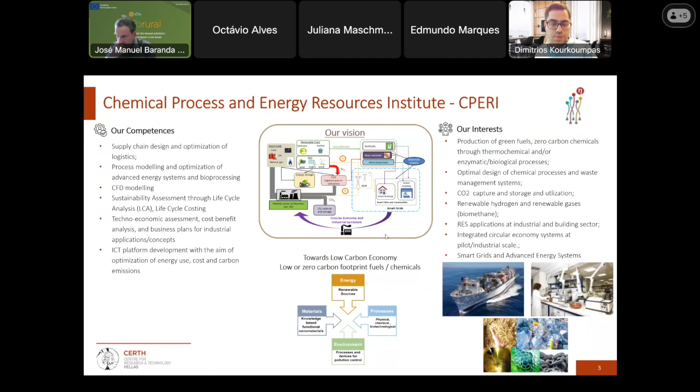Here are our group competencies, especially for circular economy, life cycle analysis and life cycle costing, which I'm leading here at CERTH.

Based on the reports and the needs of industries, we can estimate environmental assessment and economic assessment under a sustainability framework, in order to provide guidelines to industries about their environmental footprint and economic analysis.

Some activities we do in that sector include supply chain design and optimization of logistics, the production of zero, green, carbon-negative chemicals and fuels for circular bio-based systems. We develop algorithms for LCA and LCC, and we develop multi-criteria analysis for the estimation of processes under different pillars: economic, environmental, and social.

We develop business models, and as I mentioned before, we also develop an ICT platform that we will see later in the project, how we developed it and what its use is.

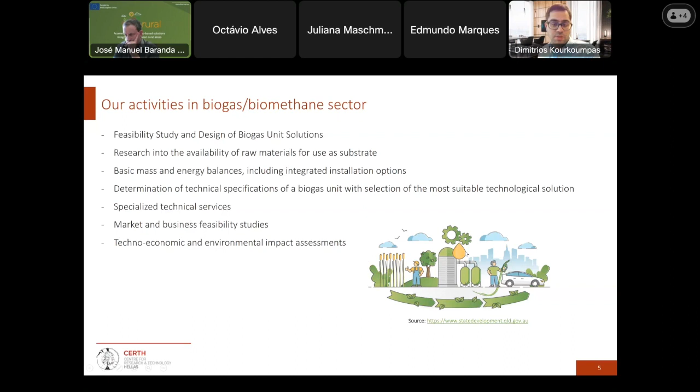We start from laboratory activities and reach up to TRL 5. We have a pilot reactor so we can simulate the activities of an industrial biogas reactor, with a capacity of about 20 liters.

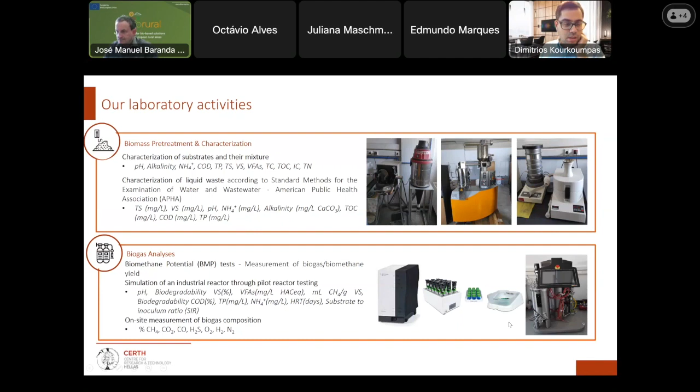Now some issues about biogas. Biogas is of course an energy resource, composed of methane and CO2, and by upgrading biogas we can reach biomethane. We also have a digestate that can be used as fertilizer, which can be characterized according to the latest regulation framework, FPR 2019.

But apart from those products, digestate and biomethane, we have also a new one: biogenic CO2 emissions. There is quite a big discussion in Europe about its use, and we'll see later on a project we are involved in, with the basic scope of producing biochemicals using these biogenic CO2 emissions.

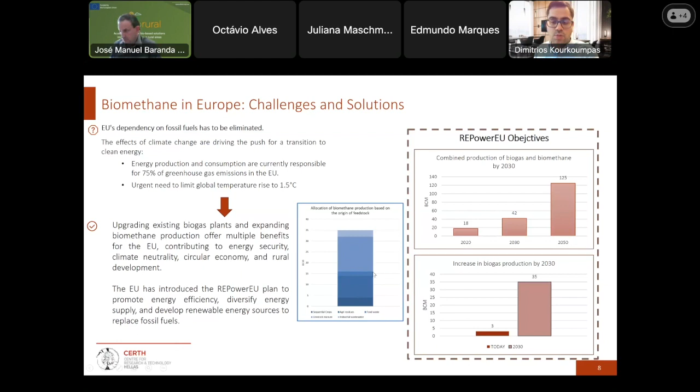Here are some key issues about Repower EU. As we mentioned, Europe promotes utilizing feedstocks from different sectors - agricultural sector, municipal sector, industrial sector - especially manure, sewage sludge, and other bioproducts from industries, to produce biogas and then upgrade it to biomethane.

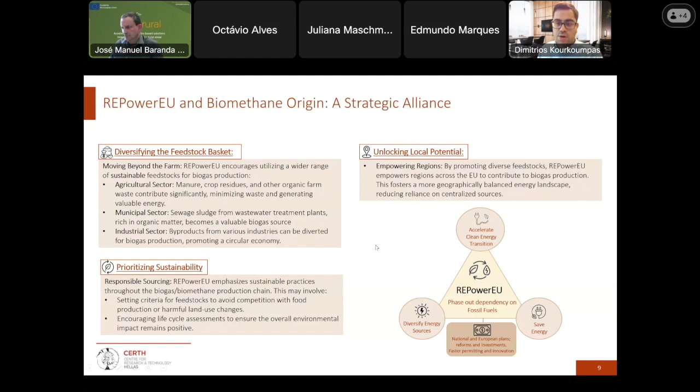There is also prioritization of sustainability, encouraging life cycle assessments to ensure the overall environmental impact remains positive, and sometimes we use negative emissions when we store CO2 and then utilize it in an added value product. Finally, it's quite significant to unlock local potential, because as we can see in the project we are involved in, there's a lot of potential for producing biomethane, but because of problems especially in logistics and the supply chain, this potential remains locked. So it is quite critical how we can unlock this and proceed to investments in the biomethane sector.

Let's continue with the first project I would like to present in this workshop. First of all, it's a biomethane project about demonstrating and connecting production innovations in the biomethane universe - that's the title. We have to develop new technologies, especially for biomethane production, in order to reduce the overall biomethane production cost and increase biomethane production compared to conventional technologies.

In addition, we have to estimate their sustainability, the environmental footprint, and the economic evaluation of those technologies, and of course propose how we can replicate this. This is quite significant in Europe - how we can replicate those technologies and go to the next level, to upscale them.

We have 5 demos in 5 different countries. First of all, it's in Greece, where CERTH is the demo leader, and here it's an ex situ thermochemical catalytic methanation using hydrogen - we will see more details in the next slide. The second one is the French case - in situ and ex situ electromethanogenesis for enhancing biogas production using electricity.

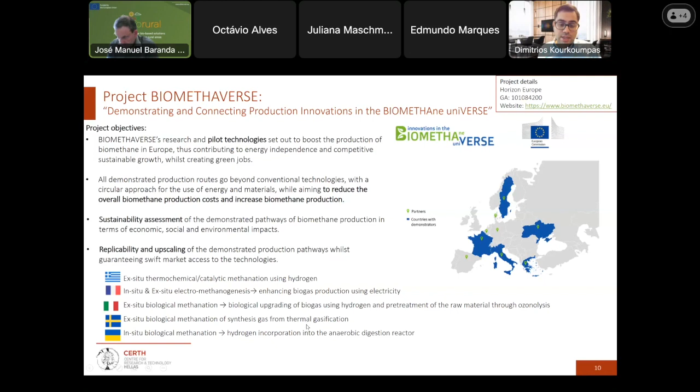The third one is the Italian use case - ex situ biological methanation for upgrading biogas using hydrogen, with treatment of the raw material through ozonolysis, here especially for sugar sludge as feedstock. Ex situ biological methanation of synthesis gas from thermal gasification. And finally, we have the Ukraine use case with in situ biological methanation, where hydrogen is incorporated into the anaerobic digestion reactor in order to produce high quality methane.

Now about the biomethane pilot plant in Greece. Just to clarify, in Greece we don't yet have a legislative framework for biomethane production, so this will be the first pilot plant developed in Greece. It will be located in an industrial biogas plant in Lagadas, North Greece. Biogas Lagadas is also a partner in the project, and we call it this demo.

Some technical specifications about the biogas plant in Lagadas: they use about 80,000 tons of livestock waste per year, produce 8,400 megawatt hours of electricity, and produce around 75,000 tons of digestate suitable to be used as fertilizer. The capacity is about 300 cubic meters of methane per hour, they operate two fermenters, and the total flow is about 500 cubic meters per hour at 100 millibar. The capacity is 1 megawatt electrical.

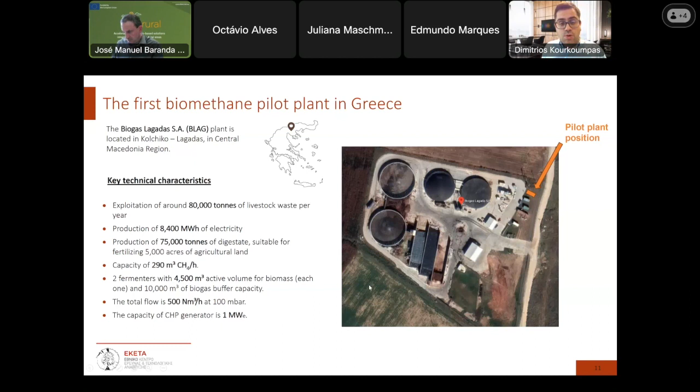I think you will see more details tomorrow, on the second day, in the presentation from my colleague Themis who is working for Biogas Lagadas.

So some issues, a brief description about the technology. As we mentioned, this is a thermocatalytic technology. There is the biogas, with input biogas flow about 6 cubic meters per hour. The composition is around 60% methane and around 40% carbon dioxide, and of course there are also some more impurities. After purification, you can see here the hydrogen and the thermocatalytic process in order to produce biomethane using the CO2 and the hydrogen.

So this is a technology not yet demonstrated for biogas. We start from TRL5. There are some pilot units around the world doing this work for syngas, but not for biogas.

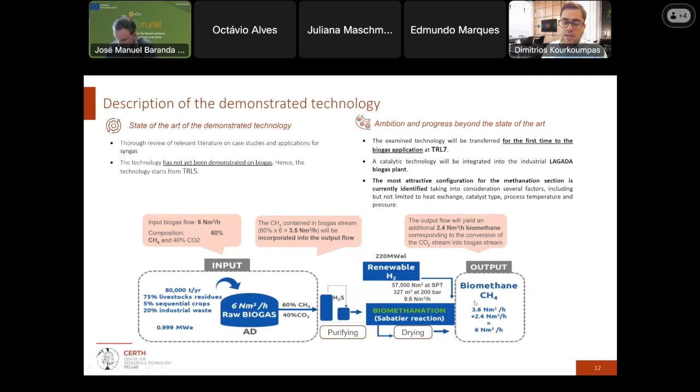Now we are working to find the most suitable configuration for the methanation section, working on the catalyst performance in order to produce high quality biomethane. Next steps involve the erection of this biomethane plant in Lagada, integrated with all other components, like for example hydrogen tank, providing hydrogen in this pilot plant.

If you'd like to participate, please visit the webpage of the project, or you can send me an email if you are interested. If you are a farmer or a biogas plant interested in receiving some services, this is free of charge.

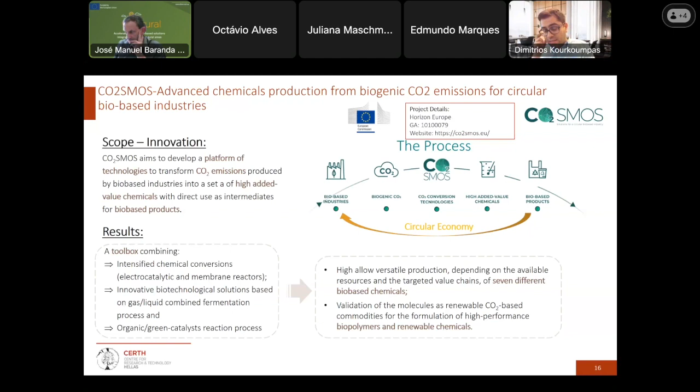It is important that, based on what the European Commission proposed, since this is biogenic CO2 emission, it can be captured and utilized in a product as a chemical, so it has negative emissions. This is quite important for the environmental assessment and for the sustainability of the processes.

Here you can see different technologies that the CO2SMOS consortium used: gas fermentation, electrocatalytic reduction, biocatalyzed conversion, liquid fermentation, and catalytic conversion.

We like to produce chemicals with low energy utilization, less than 50 kilowatt hours per kilo, low production cost, less than 1.75 euro per kilo, with high product yields, and also savings in emissions by using biogenic CO2 emissions in these added value products.

We'd also like to present that we developed an online platform. Now it's under construction, and we think by the end of the year it will be operational. On this platform, the stakeholder can make a first, preliminary assessment about the pathway they would like to follow based on their needs and their project. So it will be a platform to evaluate the pathways.

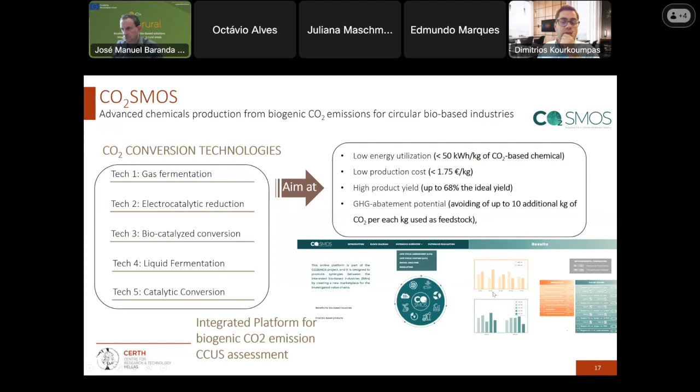You can see here some indicative screenshots, where the stakeholder or user can select different parameters they would like to investigate, and then we'll have the final results.

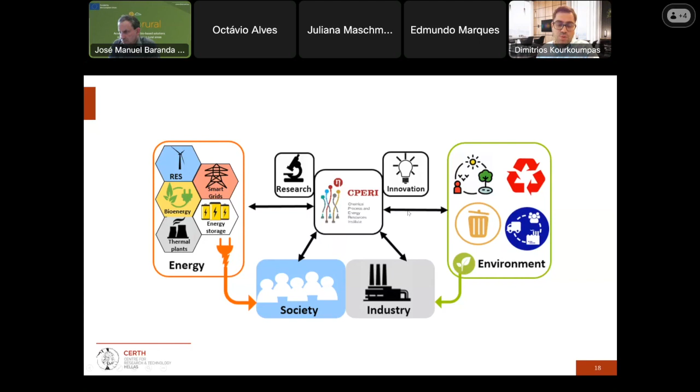Before closing, just to mention about CERTH, our group is working especially in two fields, energy and environment, and we provide services to industry, but also always taking into consideration society's needs. So we propose research and innovative projects in order to propose something more sustainable to the industry.